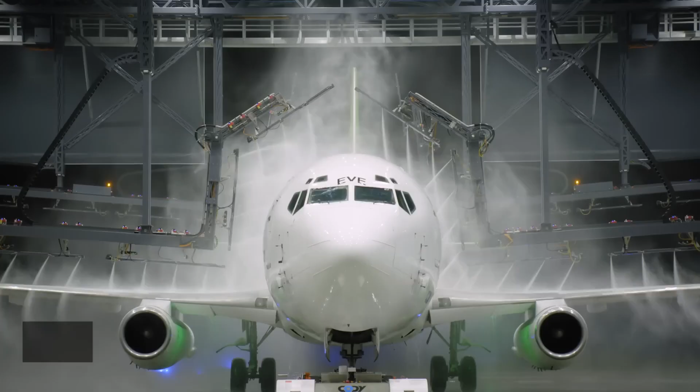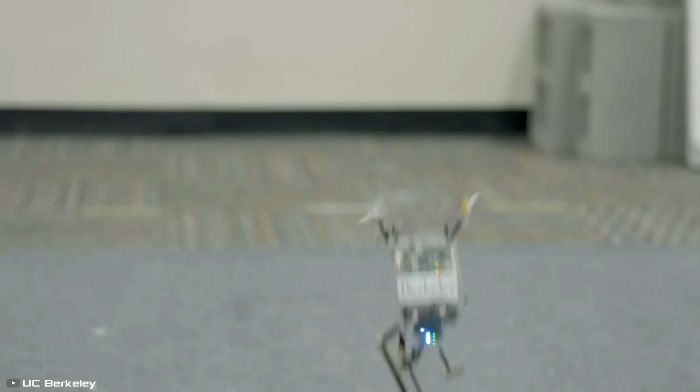You control the robot using a remote controller, and a 10-minute charge gives it enough power to do 100 jumps. The machine can jump up to 47 inches high and, despite its small size, moves at a pretty impressive speed, ranging from 7 to 10 miles per hour.

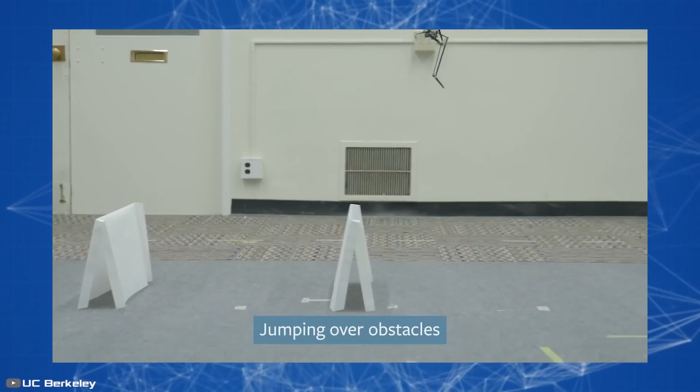Salto robots will be very useful for search and rescue missions during natural disasters. Thanks to their compact size, they can easily navigate through rubble. These machines can also be used by the US Army as reconnaissance robots.

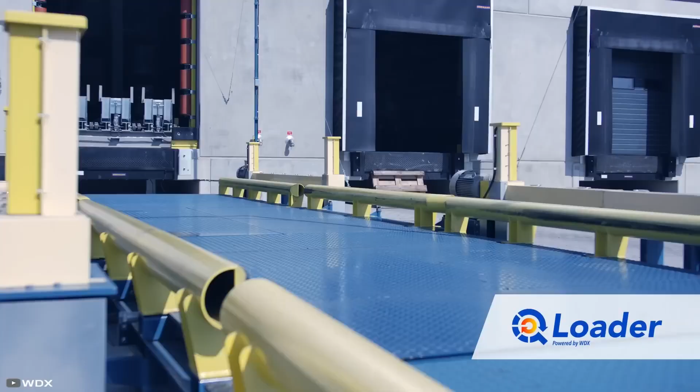The Q-Loader automatic loading system from the Polish company WDX is an innovative solution for the logistics industry. It allows for 3 times faster loading and unloading of goods into semi-trailers or containers.

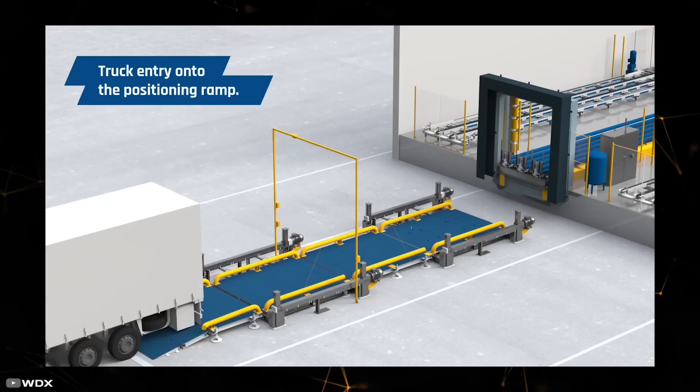During testing, it was proven that the loading time for a standard semi-trailer reduced from 45 to 15 minutes. Notably, using such a device doesn't require special adaptation of terminals and semi-trailers.

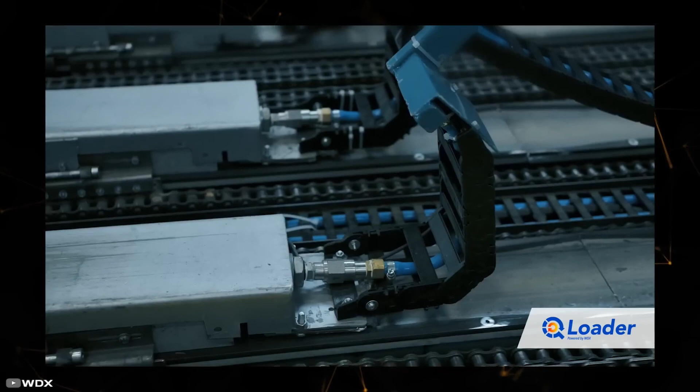The system is equipped with a special platform that resembles a forklift. While a forklift can only transport 1 pallet at a time, the platform of the device can accommodate an entire batch of goods at once.

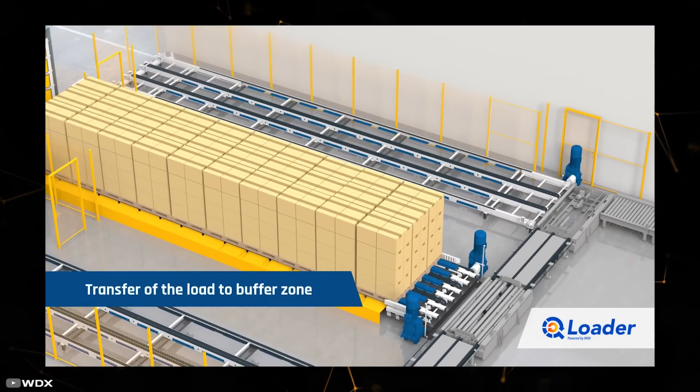After forming a batch of cargo, it is moved into the semi-trailer along with the platform. Then, the forks of the platform are released, and it returns to its original position.

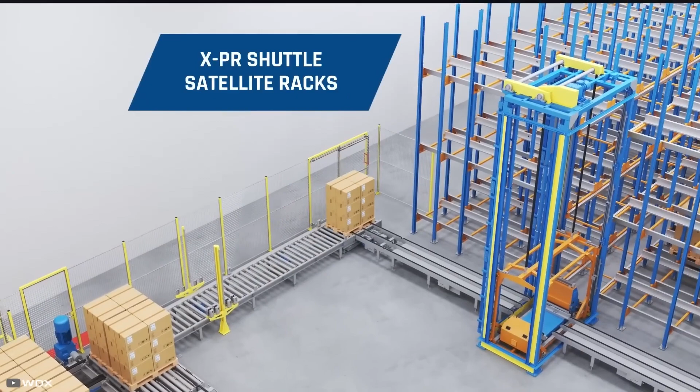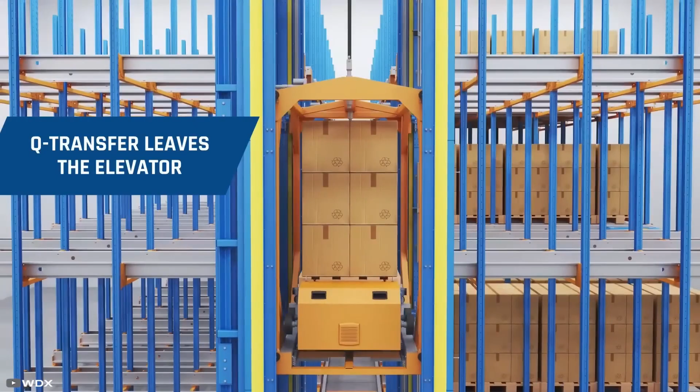Unloading of semi-trailers is done in reverse order. After unloading, the system sorts the pallets and directs them to the storage area via a special roller conveyor. In the near future, the Q-Loader is planned to be tested at the Raben Logistics Center in Stryków.

Engineers from Korea have developed a prototype of a human-like leg called HyperLeg, which can move its heel and rotate its foot. The device completely mimics the appearance, anatomy, and capabilities of the lower human limb.

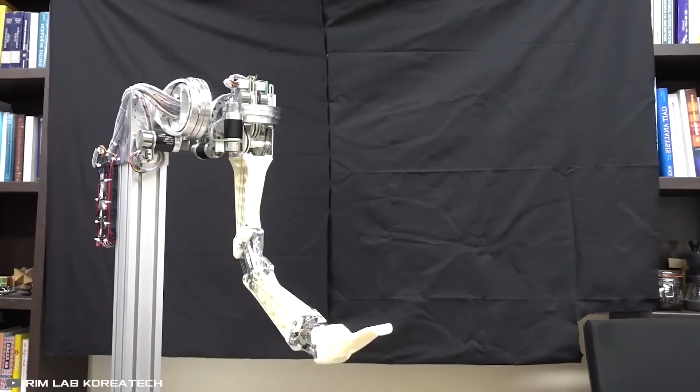The robo-leg consists of a thigh, shin, and a movable foot. The main distinguishing feature of HyperLeg is the design of the ankle joint, which has 2 degrees of freedom.

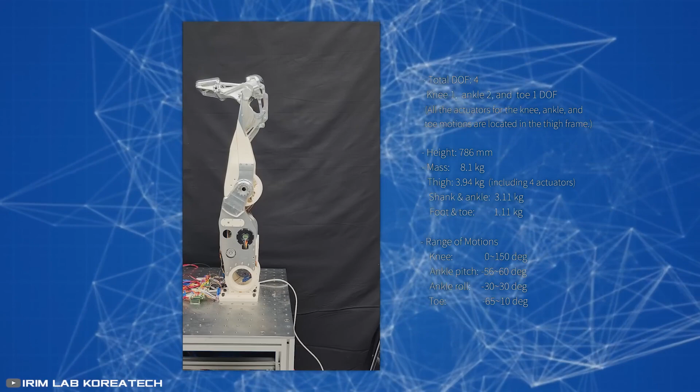This allows the foot to be rotated sideways by 30 degrees in both directions, as well as raise and lower the toe of the foot towards the shin.

When in motion, the leg can support itself on both the front and back parts of the foot, similar to how humans walk.

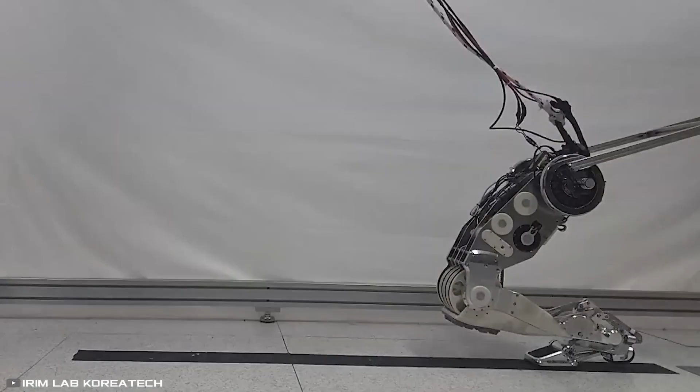In theory, such a design will allow machines to move more efficiently across various types of surfaces and overcome obstacles, compared to current counterparts.

Japanese startup N-ARK has developed the concept of a floating city called Dogen City, which will be available to provide its residents with electricity, food, and water.

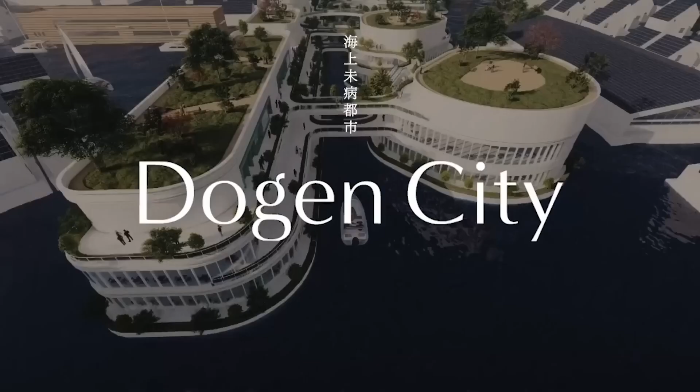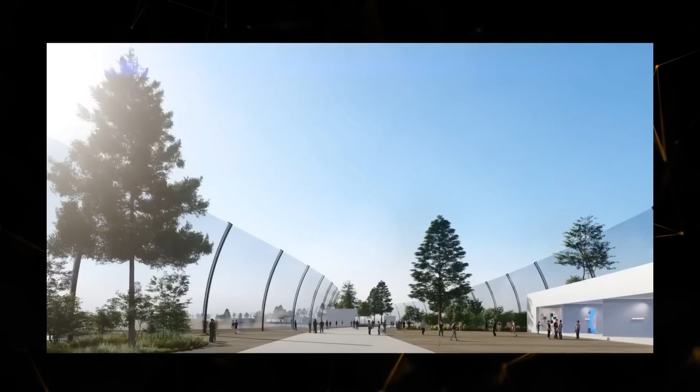The estimated population will range from 10,000 to 40,000 people. Thanks to its unique design, the city will be capable of withstanding various natural disasters like tsunamis, which are often observed near the coast of Japan.

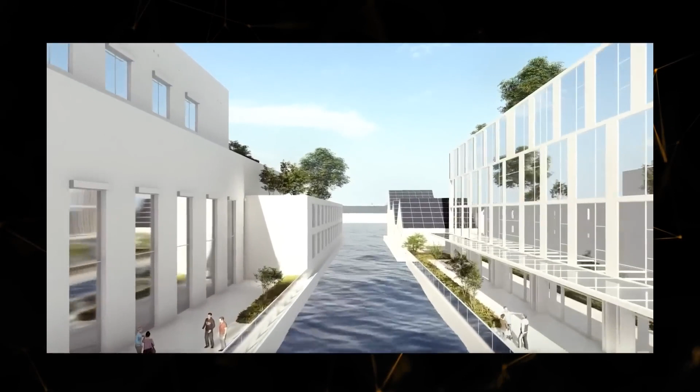Dogen City will consist of 3 separate zones: a residential ring, an underwater data processing center, and internal structures floating freely inside the ring. The city will host educational, medical, municipal institutions, and even its own spaceport.

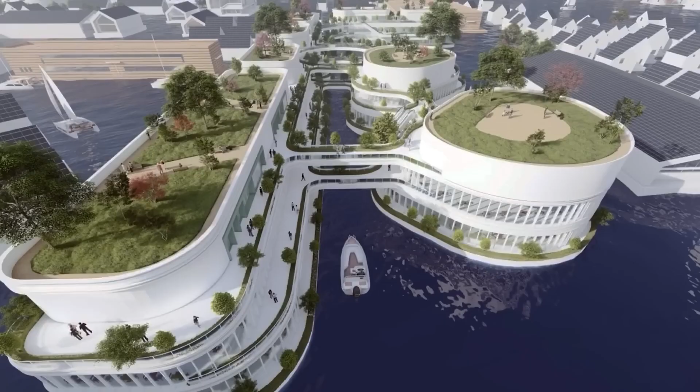Residents will be able to receive daily telemedicine consultations and monitor their health using various devices and sensors. They will also have continuous access to high-tech blood analysis for disease prevention and remote robotic surgery.

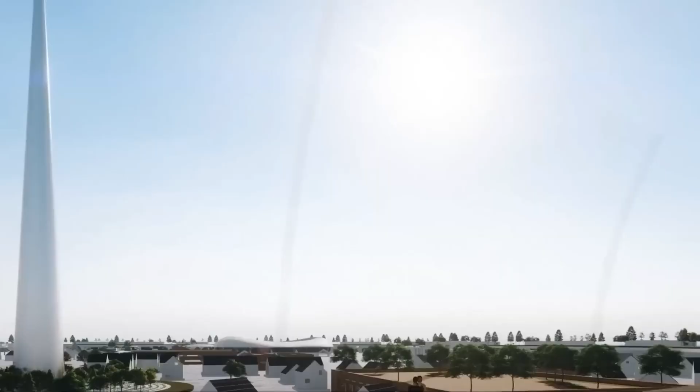Additionally, the city will have specialized laboratories for pharmacology research. N-ARK claims that the floating city will be operational by 2030.

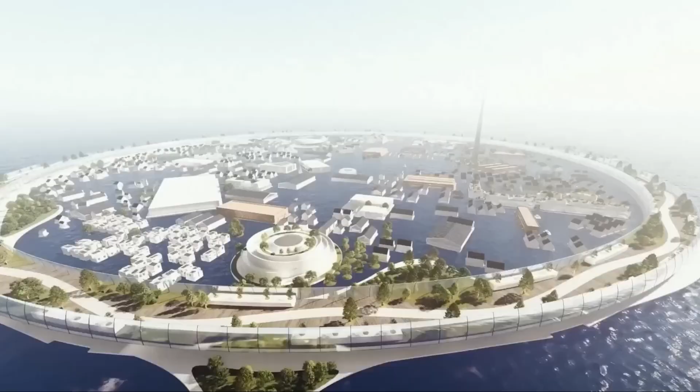While the floating city is still in its development stages, the use of quadcopters has already reached new heights. Just take a look at how drones can be used for cargo transportation right now.

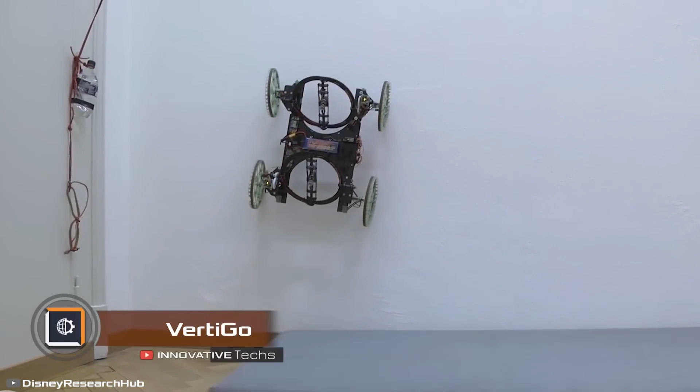VertiGo is a 4-wheeled robot that can drive on walls. To achieve this, engineers at Disney Research equipped the device with two tilting propellers mounted on top of the robot.

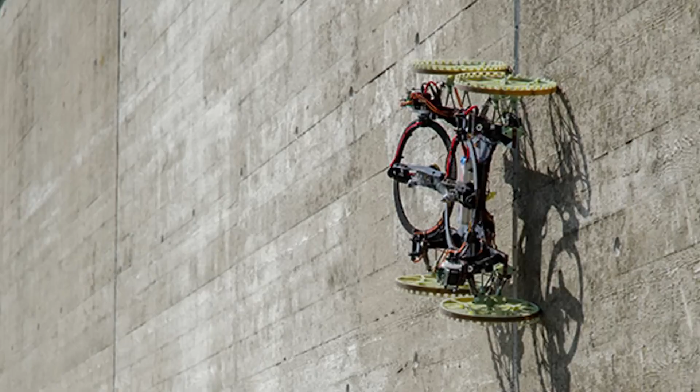By changing the tilt angle, the rear propeller pushes the robot towards the wall, while the front one pulls it upward. This allows VertiGo to transition from a horizontal surface to a vertical one.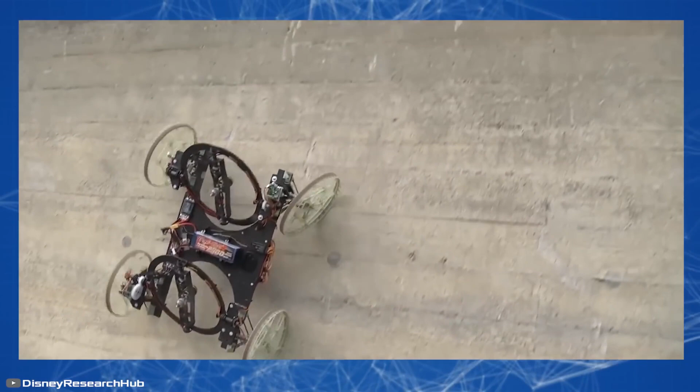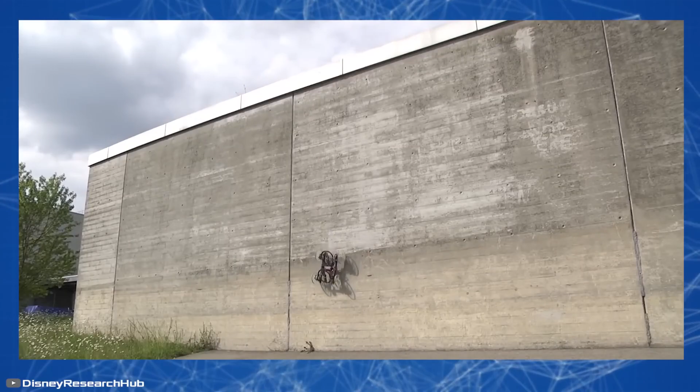According to the developers, this design gives the robot freedom of movement and flexibility in choosing its path both indoors and in urban environments. The robot is remotely controlled, but the tilt angle of the propellers is automatically adjusted based on the surrounding conditions.

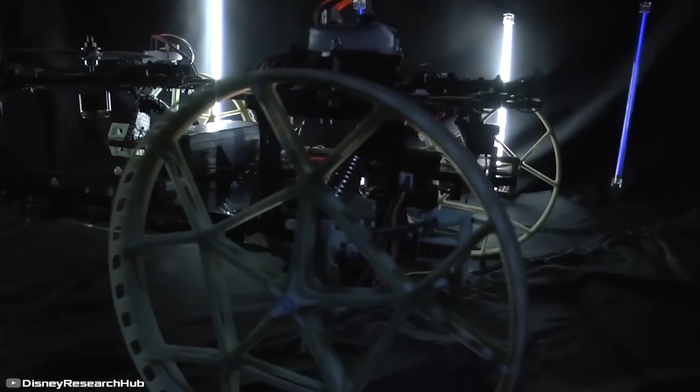Thanks to the use of advanced lightweight materials in construction, the robot weighs only 4.4 pounds and is 23.6 inches long.

Airplanes need to be cleaned regularly to ensure that dirt and ice on the fuselage don't affect their aerodynamics. To address this, MSG Aviation has developed a fully autonomous and programmable washing system capable of cleaning any aircraft from dirt or removing ice even in sub-zero temperatures.

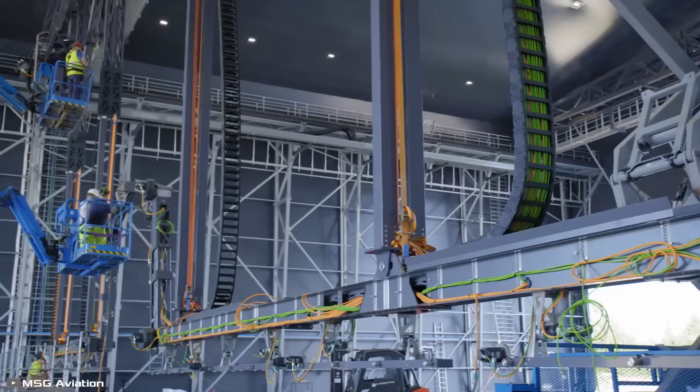The core component of the system is water cannons mounted on a special structure that mimics the shape of an airplane. They are controlled by software and, depending on the selected mode, can clean the aircraft from ice or dirt.

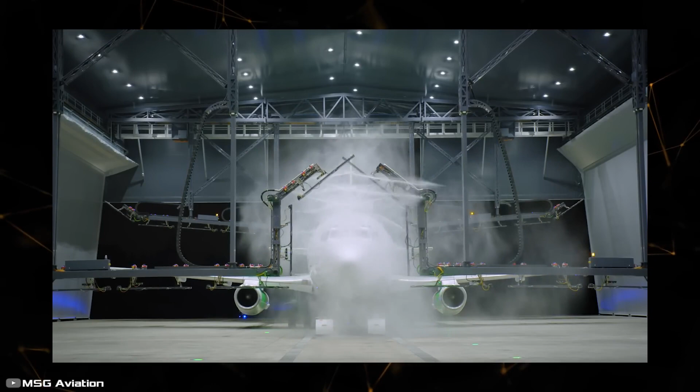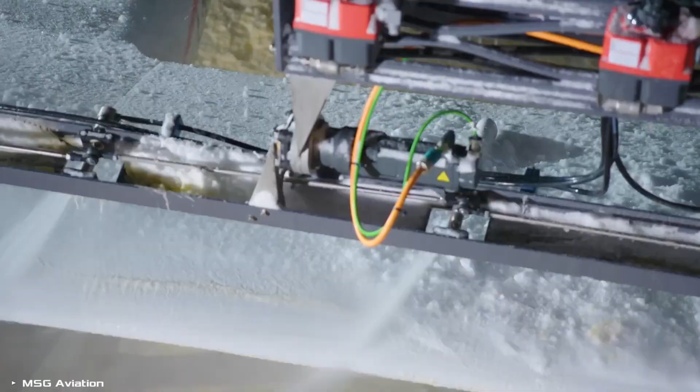This pinpoint operation enhances the efficiency of cleaning the aircraft's body compared to other similar devices.

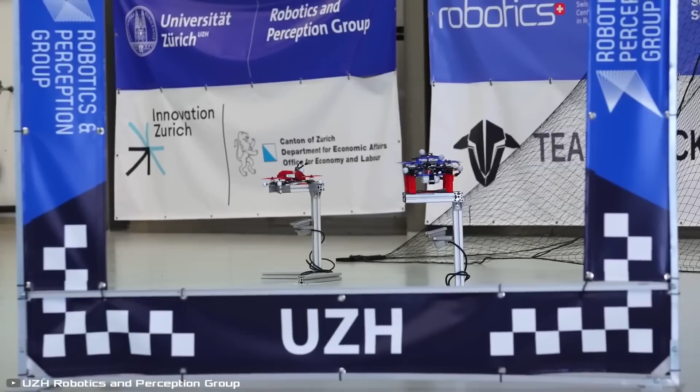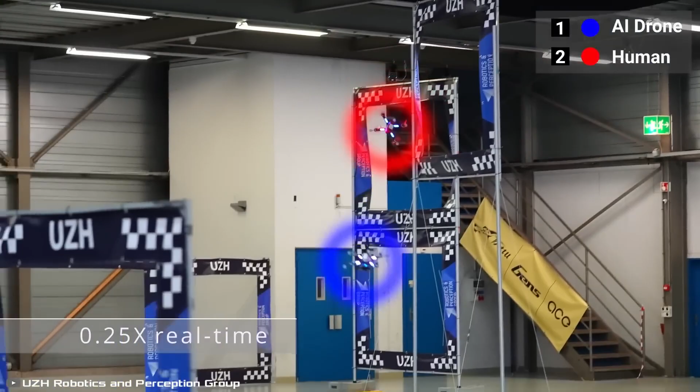The artificial intelligence system Swift, developed by researchers from the University of Zurich and Intel, defeated 3 world champions in drone racing. This event is being called a new milestone in the development of AI. The competition took place on a specially designed track near Zurich. Additionally, the AI demonstrated the fastest lap time, beating the best human racer by half a second.

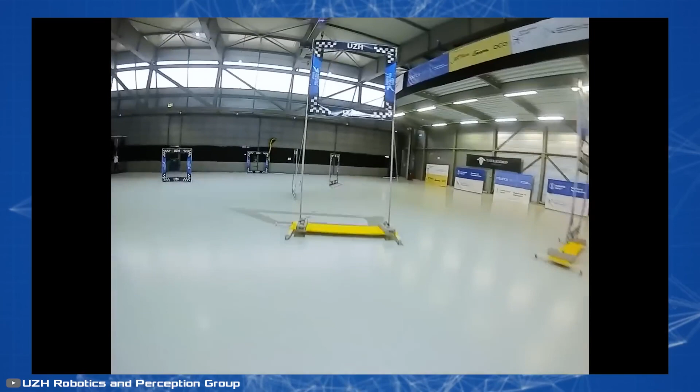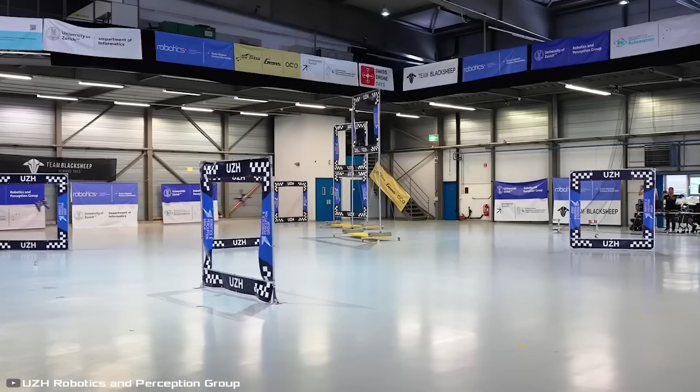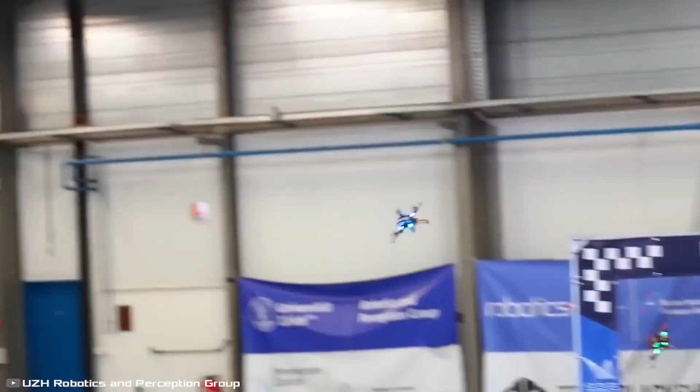The competition was on an even playing field because Swift used real data from an onboard camera, similar to what human racers use. According to the developers, Swift's capabilities could be utilized in forest monitoring, space exploration, and the film industry. Moreover, this technology could be valuable in search and rescue operations, where drones need to cover large distances quickly.

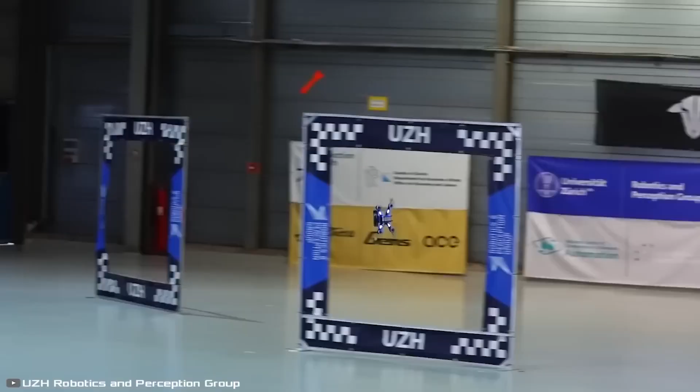Israeli company Urban Aeronautics plans to soon start serial production on the Cormorant VTOL, Vertical Takeoff and Landing Drone. Notably, this drone will operate on hydrogen fuel rather than electricity. The unmanned aircraft can reach speeds of up to 111 miles per hour and stay in the air for an incredible 5 hours. The drone was developed specifically for military purposes, as delivering ammunition to remote and hard-to-reach areas currently consumes a lot of time and resources.

It will also be used for evacuating wounded soldiers from the battlefield. It will allow medics to quickly reach the injured, and there's enough space inside to load a soldier and provide initial medical aid. Vertical takeoff and landing are achieved through 2 fans located parallel to the ground within the drone's body. Horizontal movement is controlled by 2 vertical thrusting screws at the tail.

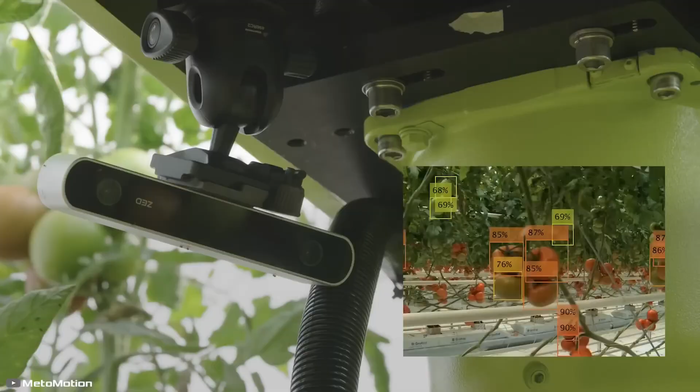MetoMotion is the first AI-powered robot designed for tomato harvesting. Not only is it capable of picking tomatoes, it can also understand the structure of plants, the environment, and independently assess the ripeness of the fruits. The robot features 2 manipulators for harvesting tomatoes from both sides of the row in high-tech greenhouses.

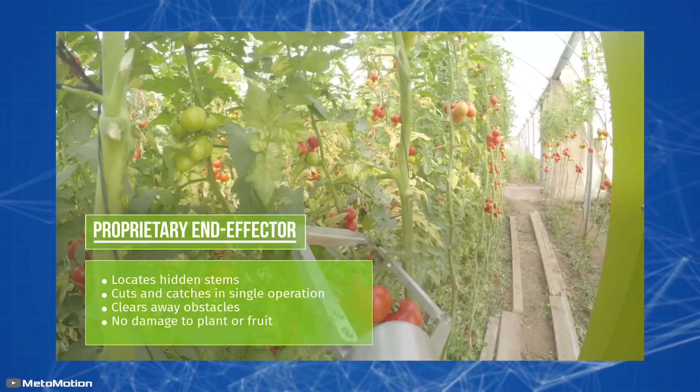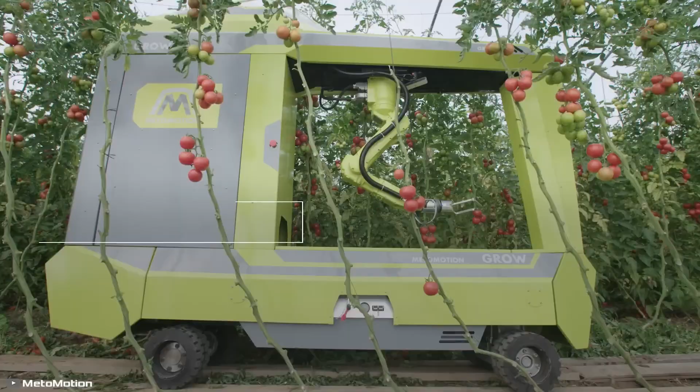This autonomous vehicle is equipped with 3D AI-based vision technology that creates a map of the plants and crop. The advanced vision system identifies ripe tomatoes for harvesting and directs the manipulator to the right spot. It cuts and collects the tomato branches, then places the fruits on a conveyor belt that dumps them into onboard containers. All these actions take just 16 seconds.

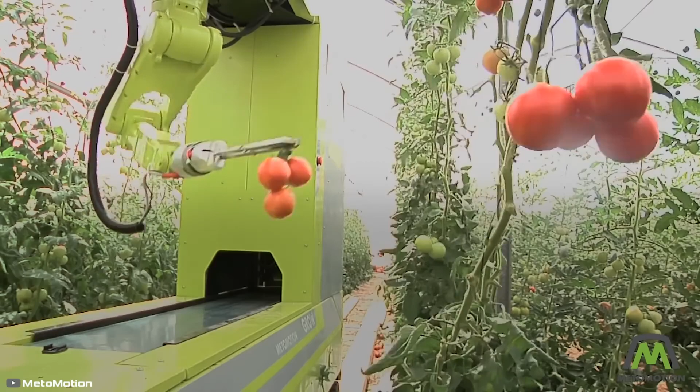Once the unmanned robot reaches the end of the row, it stops, detaches its trailer, and sends it to the storage.

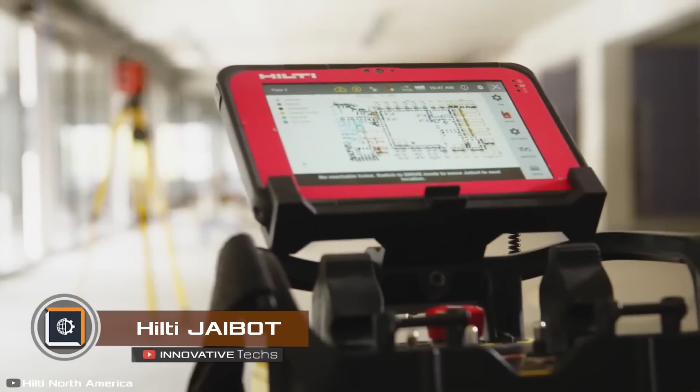You've probably had to drill a hole in the ceiling at least once in your life, and you understand how frustrating and tiring it can be. Now imagine having to drill hundreds of such holes each day. It feels like an impossible mission.

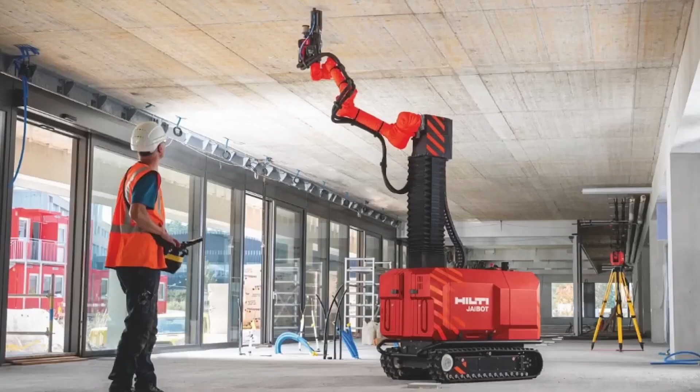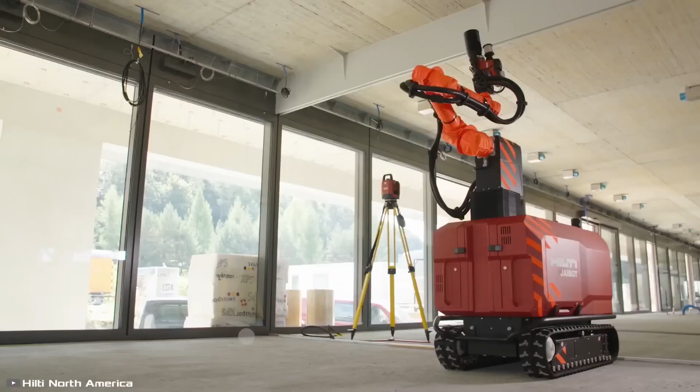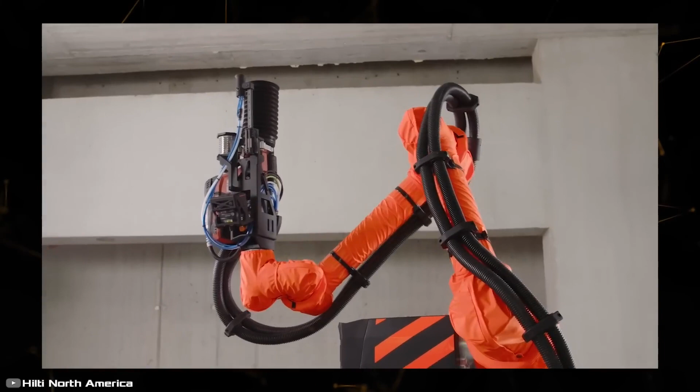But there's a solution: the unique Hilti Jaibot. It's a semi-autonomous robot on tracks with a mechanical arm that can effortlessly handle tools weighing up to 22 pounds and reach heights of up to 10 feet. During test trials, the robot drilled 90 holes in 1 hour, which is an unofficial world record. Additionally, the robot marks and meticulously documents the depth, diameter, time, and location of each drilled hole.

In South Korea, automated systems are also assisting people. Sprinklers installed on the median strips of roads pump rainwater directly from the drains. Besides keeping the roads dust-free, they also cool down the asphalt in hot weather.

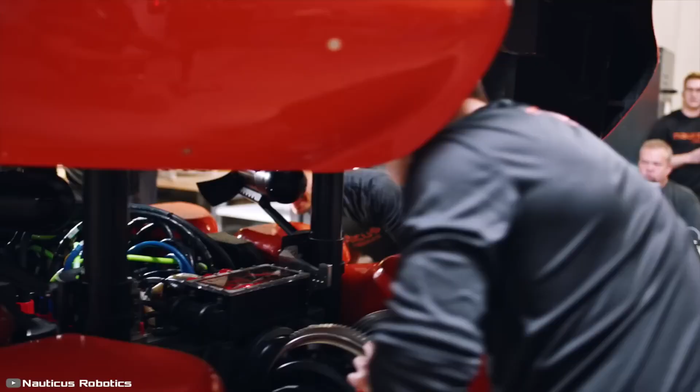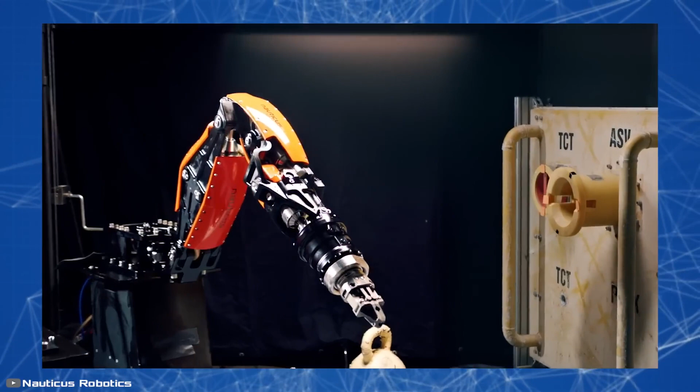Startup Houston Mechatronics has launched the first of 3 second-generation underwater robots called Aquanaut Mk2. This AI-based device is designed for collecting data and servicing equipment located in the ocean. It can operate autonomously at depths of up to 984 feet and is intended primarily for deep-sea work on offshore oil and gas platforms. This industry relies heavily on underwater equipment that requires regular inspection and maintenance.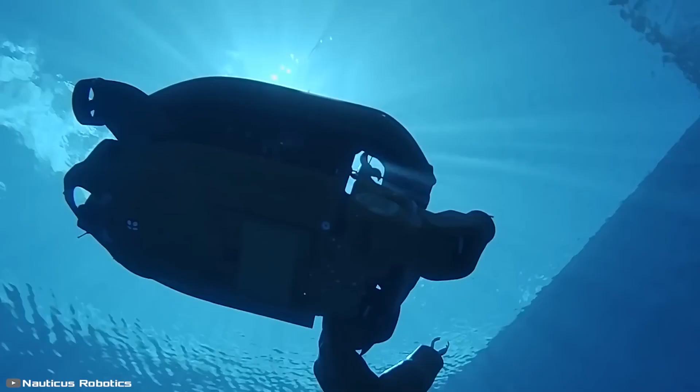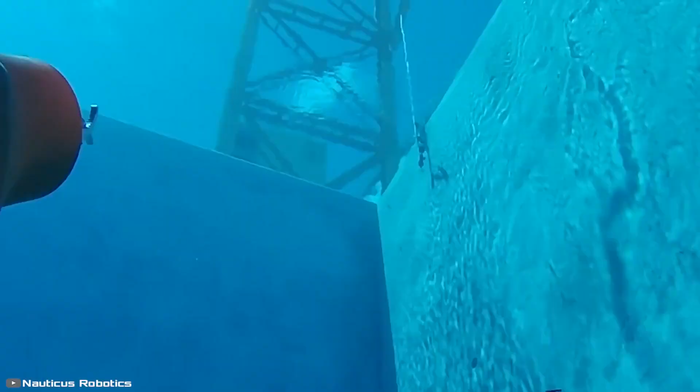To perform routine wellhead maintenance, certain valves need to be turned. Until now, remotely operated vehicles (ROVs) were used to tackle these tasks, but they required an operator and a long cable. Aquanaut Mk2 is entirely autonomous. It can autonomously navigate to the location, inspect the object, and complete the assigned task using its 2 manipulators. The robot can be transported to the site on a small boat or dropped from a helicopter.

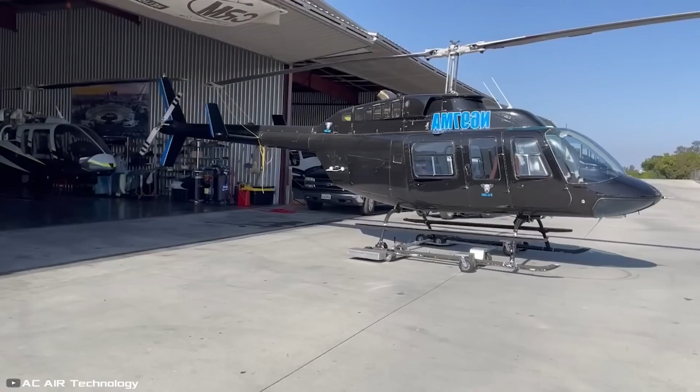T1N2 is a motorized tracked platform with wireless remote control designed for loading, transporting, and unloading helicopters. It is intended for helicopters with skids and a weight not exceeding 6,000 pounds. To load a helicopter, the platform crawls under the front skids and, using a pair of conveyor belts located on top, pulls the aircraft onto itself.

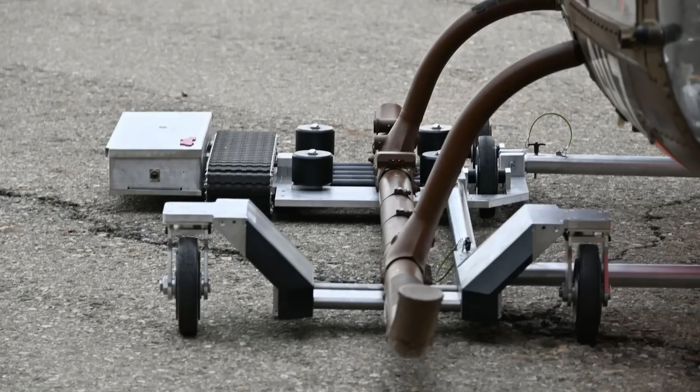After securing the helicopter on the platform, the operator guides it to the takeoff area or into a hangar. The platform's battery provides 30 minutes of operation on a single charge and can recharge from 0 to 100% in a couple of hours. Additionally, the device comes with an extra interchangeable battery for intensive use.